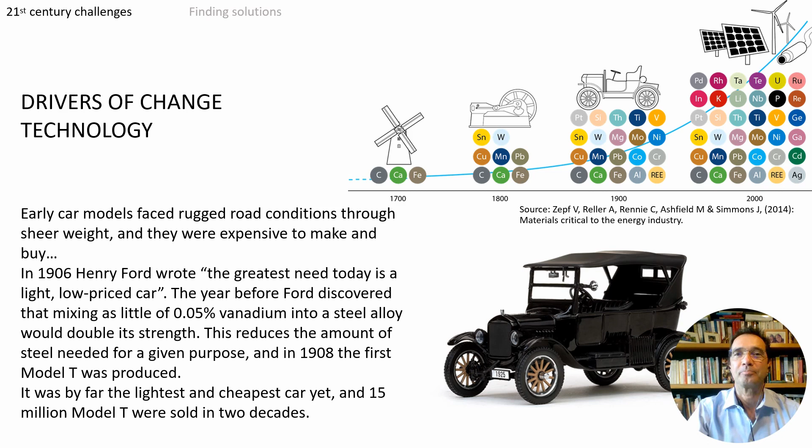Before 1983, most of these G7 countries were also mining countries, meaning that they were extracting the raw materials that their industries were using. Of course, they were facing challenges, not only social challenges. Margaret Thatcher, for instance, was facing opposition from unions. Helmut Kohl in Germany was facing opposition from environmental groups worried about pollution. And these leaders realized that if they facilitated trade, basically enabling the movement of goods and materials all over the world, then they could also give a chance to developing countries.

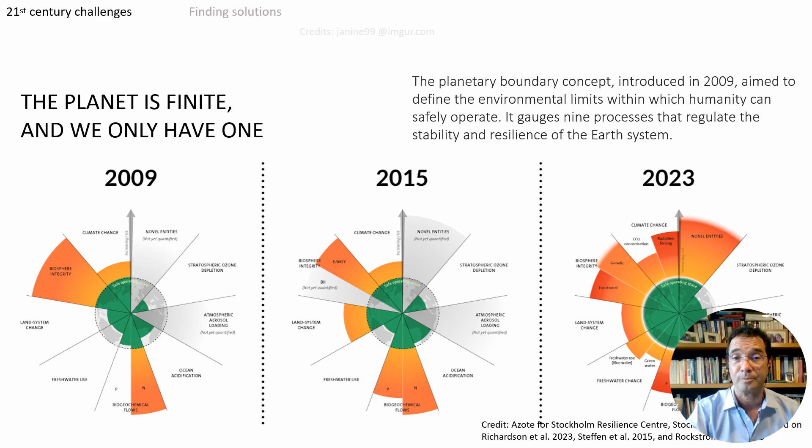And of course, this is already raising alarm, especially for some policymakers, not all. But in Europe, this has been taken very seriously. And looking for solutions, what the European Commission decided already in 2019 was to become climate neutral. So the idea is to make the entire European Union carbon neutral by 2050.

And with this aim, we now have the Green Deal, and we have a new industrial package. The idea is to push forward and accelerate the energy transition, trying to move away from fossil fuels. The problem this brings to Europeans is that renewables are far more materials intensive than fossil energy.

And since 1983, we decided to stop mining, or in a way, we faced a huge decline in mining in Europe because we were relying on trade. What we realize today is that we are 100% reliant on third countries' imports for many, many minerals. And this is a problem. It wouldn't be a problem if we were trading on a level playing field, but this is not the case. So we have basically 2 options.

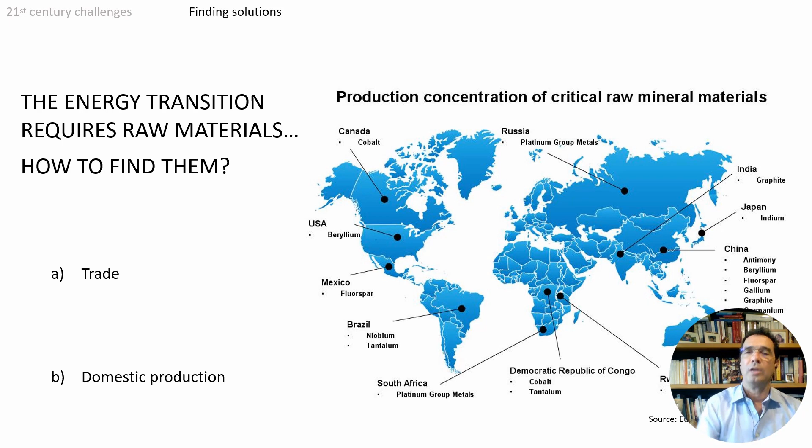Either we look to trade, as we did until now, but we already have concerns because some of these materials that we need to import are crucial to the economy, and they are being extracted in countries where one can have disruptions. That's the reason why we are doing these criticality assessments in Europe every 2 years. So trade is an option. The other option could be domestic production, meaning having domestic mining in Europe again. Looking at trade in more detail, I would say that the big problem is resource nationalism.

We have seen some countries that are saying that if you want to extract the mineral in this country, you also need to increase the value. I mean, the case for lithium, if you want to extract lithium, you need to have the battery factory also established in this country. And sometimes this is not possible because we are talking about deposits that don't have a dimension that is big enough for that. But that's one aspect of resource nationalism.

The other one is political instability. That assessment made in 2022 by Maplecroft, they were saying that out of 120 countries that they assessed, 88 were likely to experience more instability. And probably today, in 2023, one could say that they were fairly conservative, because many countries, look to what's happening now in Africa, that were so far reasonably stable, are now facing turmoil.

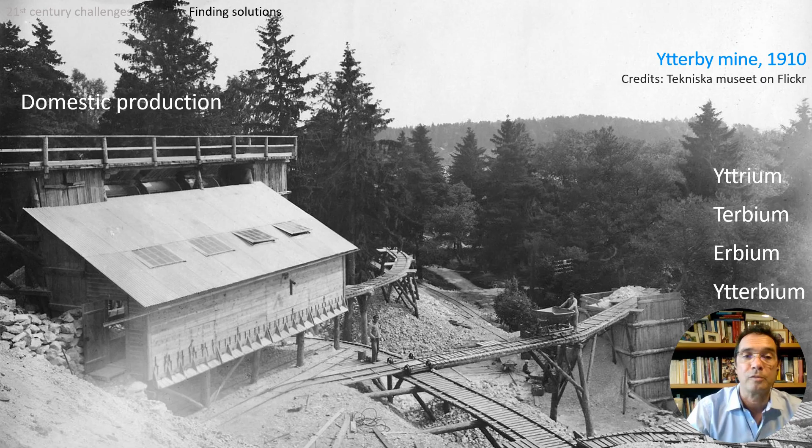That's a rare earths group that were found for the first time in 1910 in Sweden, in a place called Ytterby, located close to Stockholm. So the Ytterby mine in 1910 was producing basically tungsten, but they also found there these rare earth elements. And it was so important that 4 rare earths were named after the Ytterby mine, where they were found for the first time in 1910. So we do have the geological endowment.

But the problem is more complex than most people realize, especially policymakers, because it's not only saying that, okay, we need, for instance, gallium, or we need germanium, so let's mine gallium, or let's mine germanium. This is not the case. Most of these critical raw materials are byproducts of major metals, so major mining operations. This is not the case, if you look to the diagram in the image, for the elements below, like uranium, chromium, lithium, potassium, or tungsten. It's not really the case for rare earths. You can have light or heavy rare earths, but it's the case for most of the other critical raw materials.

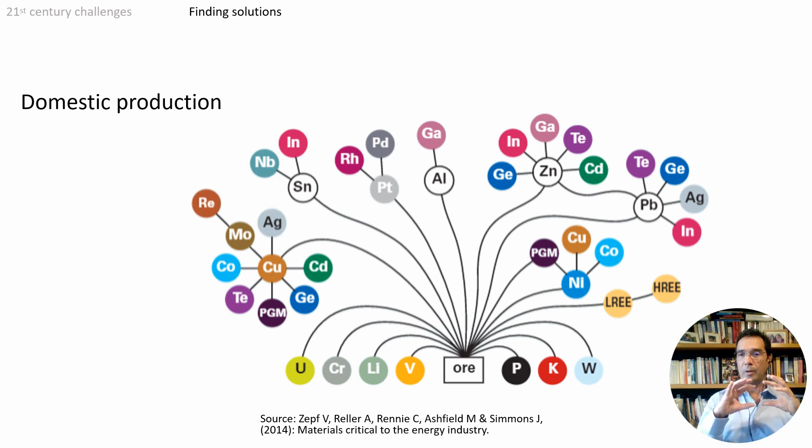So if you want to have gallium, you probably need to extract it from zinc or from aluminium. It's a byproduct of the extraction of these elements. If you want to have indium, again, you'll be looking to zinc mining. And if you want to have rhenium, you'll be looking to copper mining. So the situation is complex, and you cannot say let's have a mine that will be targeting only these critical raw materials, because sometimes you need to have these big mine projects in order to have access to these byproducts.

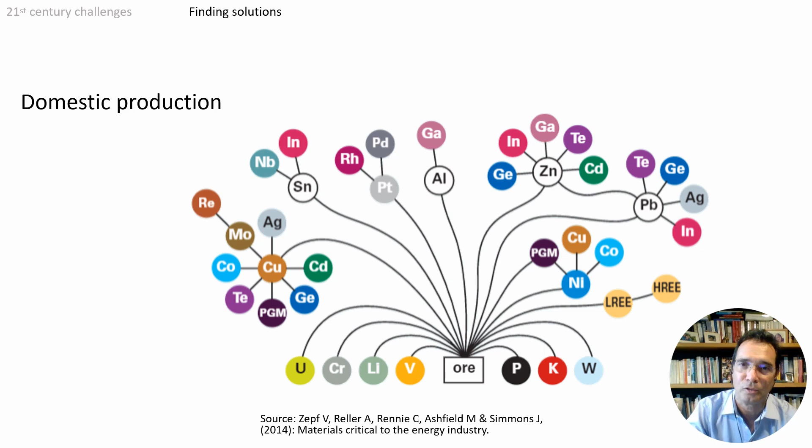So domestic production has this, if you want, this level of complexity, but it has others. And perhaps the most difficult one is the public opposition to mining. One needs to bear in mind that Europe is a populated continent. I mean, we have a huge population. Despite this political will to speed the energy transition, which, by the way, is supported by most citizens, the reality is that if you need to extract the materials that you need for the energy transition in Europe, you'll be facing a strong public opposition.

And these 2 examples are about lithium mining. One is the protests that happened in Lisbon in 2019. People were against lithium mining in Portugal, and we are not talking about lithium mining in some environmentally protected area or in a park.

No, we are talking about lithium mining in the countryside. And the same thing happened in Belgrade, in Serbia, in 2021. So in Serbia, Rio Tinto had a project that was very well developed, an important mineral deposit that could supply lithium for the European needs.

And basically, despite having all the required permits, the environmental impact assessment, everything, once the government announced that they will be giving the mining permit to Rio Tinto, people came to the street, and the protest was so strong they cut off highways, and basically the government was about to collapse. So they backtracked in that decision and they stopped the mining process.

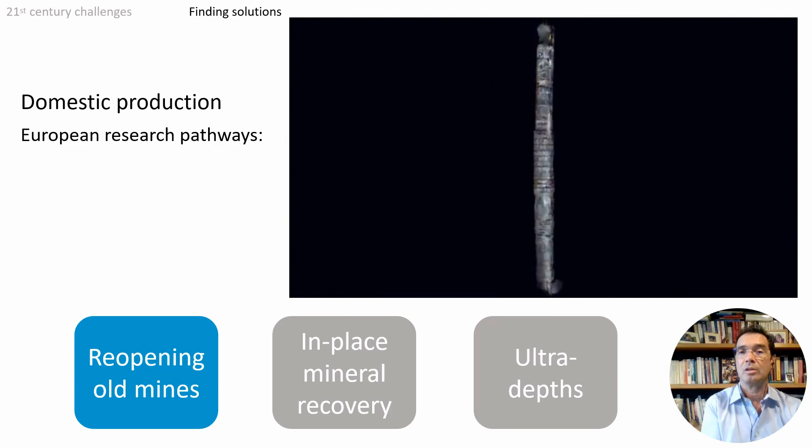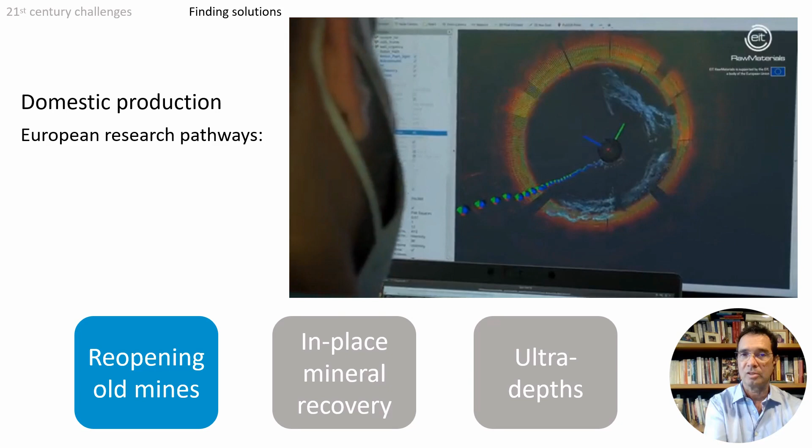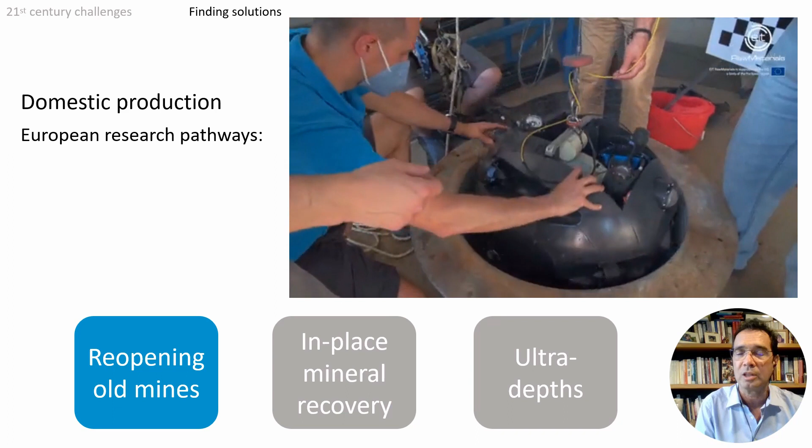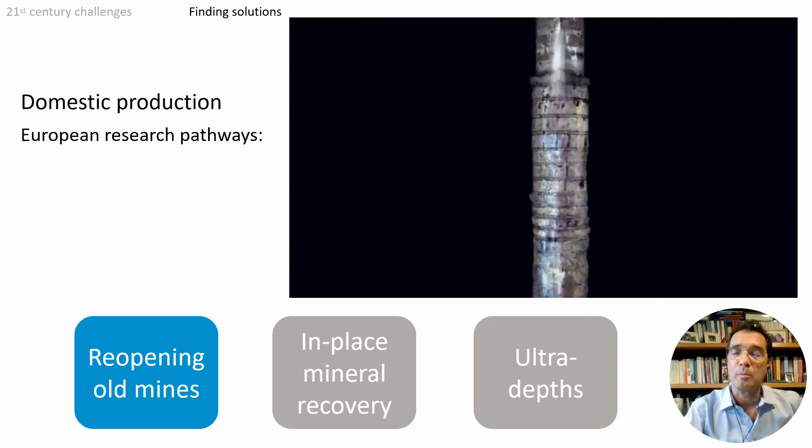The idea is that you have this sphere that you can put down below. The sphere will be capable of navigating under the water and basically mapping and sending to the surface the information on the mineral potential of those areas. This is useful because in Europe we have if not hundreds, perhaps thousands even, of abandoned mines that were closed. Some of them were exploited in Roman times, others in the medieval times, but they are closed for centuries. So having this updated information is very important to assess the importance and the possible reopening of these mines.

That's one solution. Another solution, as I said, is in-place mineral recovery. The most typical example is in situ leaching. But this project that you have in the image, named CRM Geothermal, is looking to a different perspective. So in that case, they are looking to the potential of geothermal deposits to provide also metals and to extract, if you want, at the same time. So having a combined extraction of the heat that is used to produce electric energy and also the metals that exist in the solution.

We know that these metals exist because if you look to the photo above, it's a 20 centimeters pipe that is basically clogged with scales, with calcite or silica scales, and these scales quite often have metals. So they have metals deposits, typically lithium, also strontium, sometimes gold or silver, and of course iron. So the idea is, can we extract the metals from the reservoirs? In that step we could prevent scaling, so enhancing the energy production, and at the same time cover the EU needs for these raw materials.

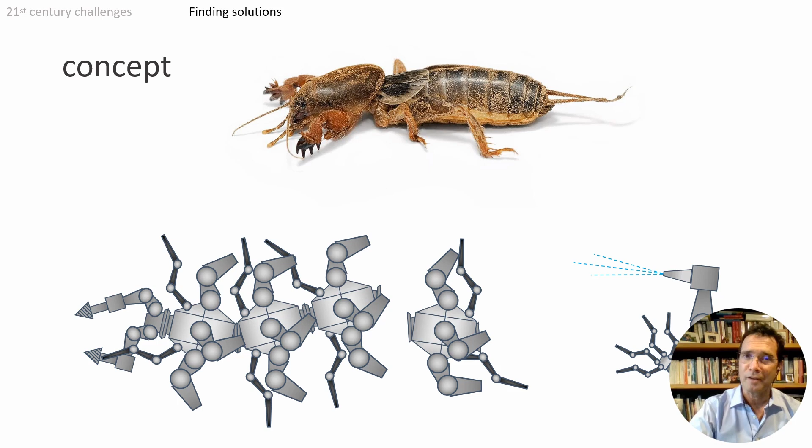And then the robot will be capable of reconfiguring on site, meaning that it will be having a part that will be providing, let's say, the energy. Another part will be having the excavation tools and so on. So the reconfiguration will be enabled depending on the needs that the robot will be having on site underground. So that was the concept. What we have now, it's important to say, it's not exactly like that yet.

So this is the image of the prototype. If you go to the website, you can see the movies. They were doing field trials in Estonia 2 months ago, so quite recently. They will be doing more field trials in Slovenia next month. So all these field trials are basically trying to see how the different parts are assembling and how they are moving. As I said, this is not exactly the final product yet.

It's important to say that this is a vision to 2050, and in the end vision we'll be having something that will be smaller, perhaps the size of a 2 liters Coca-Cola bottle, with these different components that will be self-assembling and having different functions and working underground. So this is what we have now, but what you see is fairly complex.

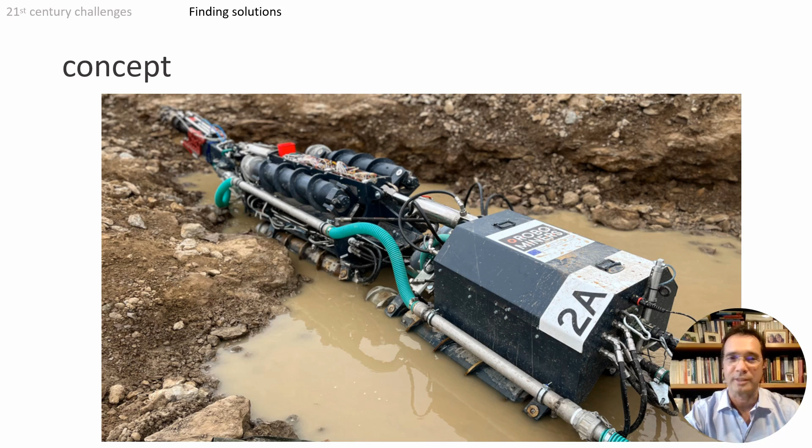And it's fairly complex because this robot has these navigation capabilities and also autonomy enabled already, meaning that once it is down below, it's capable of sensing where it is located. So it is using accelerometers, because we won't be having GPS signals or something like that. The accelerometers are very precise. They will be telling us where the robot is located, because the robot will be following a geological model that will be prepared beforehand. So these navigation capabilities are very important.

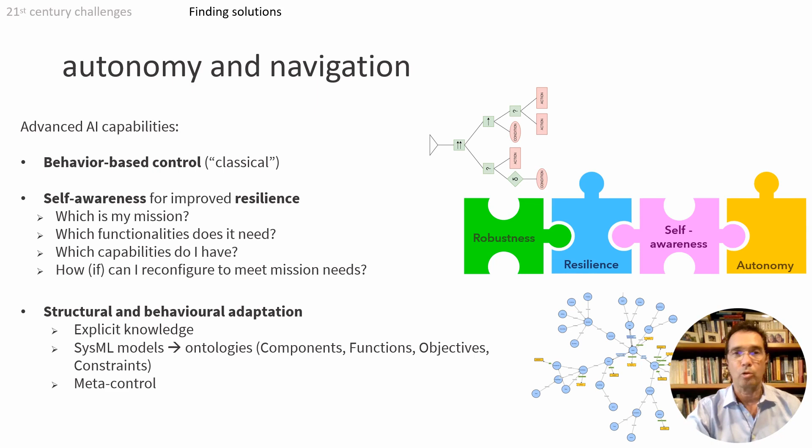It's also important to emphasize the autonomy, meaning that the robot will be capable of even self-repairing, or if you want, self-reconfiguring, using a different module and replacing the modules, and of course using energy, especially going to a docking station or something like that to recharge. So all these features are already enabled in that prototype. They already exist. And the prototype has more.

So for the navigation, I just mentioned the need of using the accelerometers and also to communicate with the surface. You see how the modules in these examples on the left hand side will be coupling to each other. So they will be specialized modules coupling and decoupling according to needs.

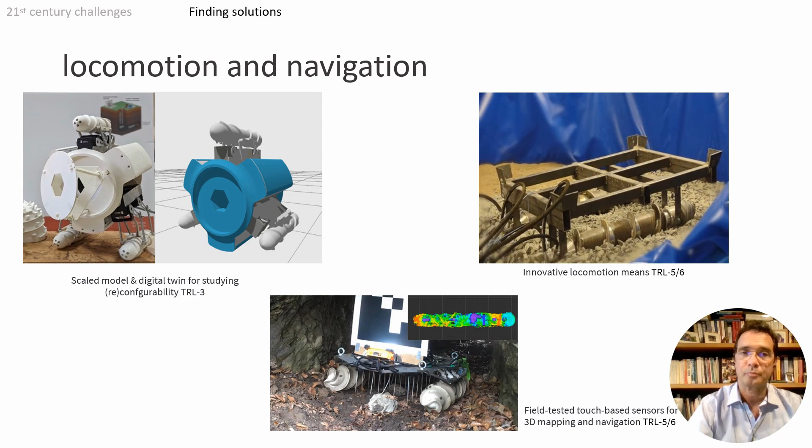And the locomotion uses this Archimedes principle. So basically we are using these rods. The equipment in the prototype has 4 rods, and these can be expanded against the walls of the gallery, in order to hang the robot against the walls to secure it, so we can have the strength to push the arm that will be doing the excavation. So these features are already there.

Also important to underline this sensing capacity, because the robot will be excavating. It will be extracting small rock chips that will be analyzed as they pass inside the robot. So these chips will be analyzed in order to provide the information to the robot if it is really on site, I mean, if it is in a mineralized area.

If not, the robot will need to correct according to the geological model, or in case the geological model is wrong, I mean with an important fault, then this will be communicated to the surface in order to do some sort of reassessment. But this sensing is very important because, as I said, it will be done in real time as the excavation proceeds. So it will be a combination of geophysical sensors and also mineralogical sensors capable of tracking what's being extracted as excavation proceeds.

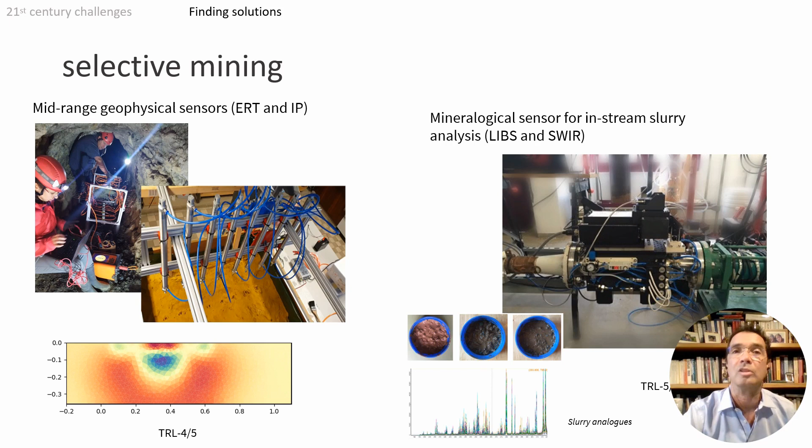For the time being, the prototype will be having this arm using a tricone. The advantage of having the arm is that it can allocate more time to areas where it's more difficult to excavate. It might be also possible to combine hydrodemolition and the tricone drill bit. So this is still under development.

And the production tool is something that is a challenge, because, as you know, in normal diamond drilling, one can replace the drill bit easily. In this case, that will be a challenge because it will be an underground robot designed to work non-stop for several days. So we need to find a solution that is sufficiently stable.

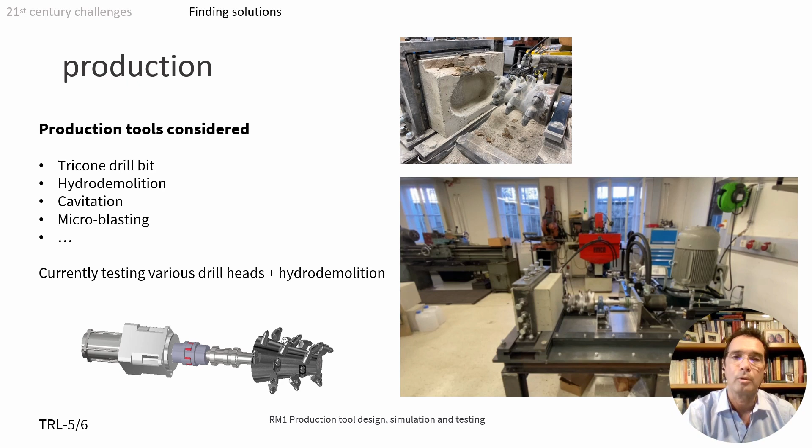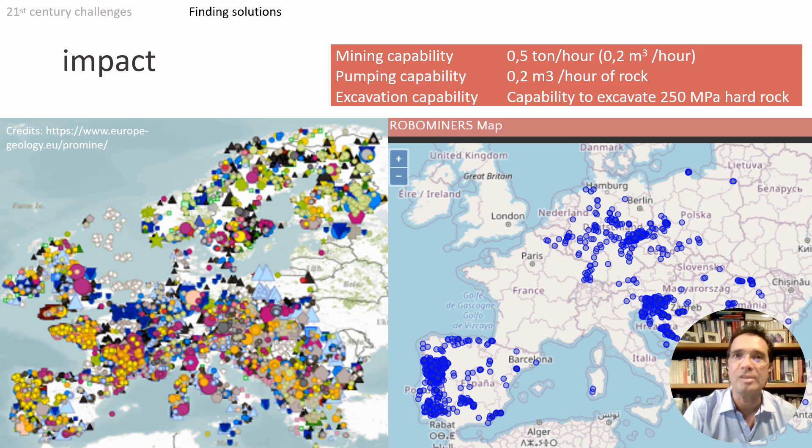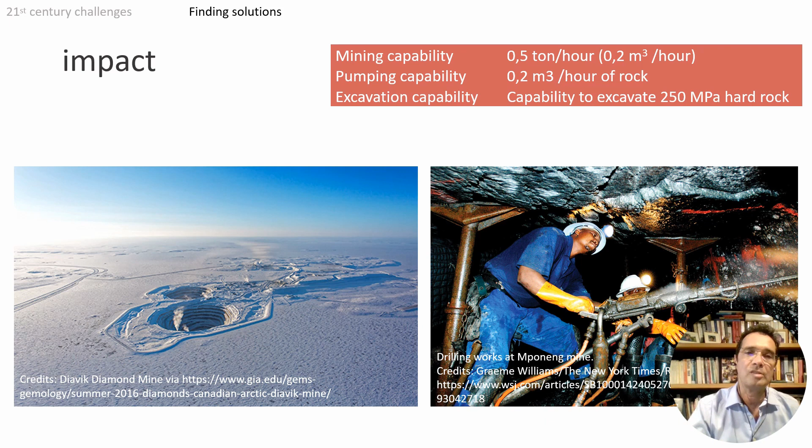You can have not one robot, because as you see, one robot, from the economic perspective and from the amount of materials produced, might not be so relevant, but you can have a swarm of robots. So imagine a swarm of robots mining down below a big city like Paris or Berlin, extracting the minerals there, and this will be a completely invisible mining operation. So these are the sort of futures that this technology might put forward.

Finally, let me emphasize the environmental footprint. If we were together in a room, I probably at this moment would be asking the audience if you have been inside a Roman mine or inside a medieval mine, and asking you to raise your hands. As this is not the case, because this is a remote presentation, just let me emphasize this.

If you visit one of these mines, you will notice that you will probably need to enter crawling, because the access and the galleries are very small. And the reason why is that the Romans were using children. They were using child labor, slaves, children to work underground. This is not something that was done only by the Romans. In coal mining in the UK during the Industrial Revolution, the British were also using children in the coal mines, and the reason was basically to minimize the amount of waste rock to extract. By extracting less rock, it minimized the amount of effort to be made.

I would say that with this technology, by using a system that goes only to the mineralized areas and avoids the extraction of waste rock, the environmental footprint will be much smaller, because we won't have this huge amount of waste rock on the surface. So that's a very important issue to underline.

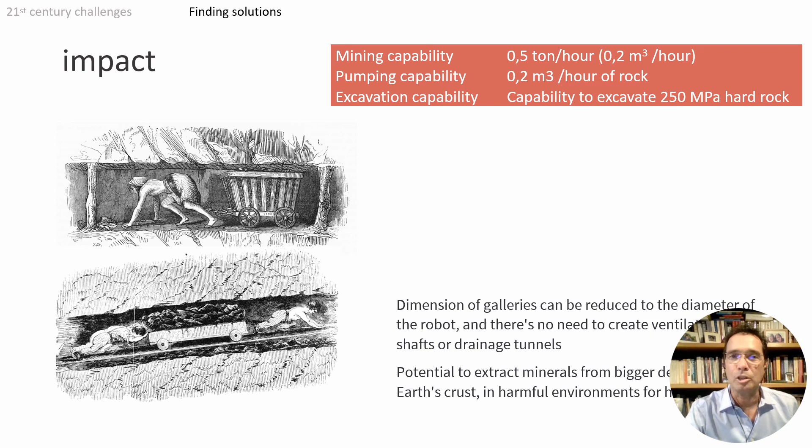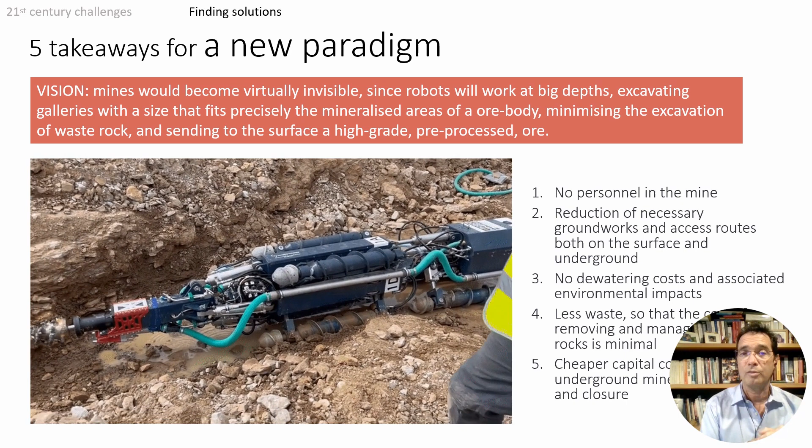And if I may, to close, I'd like to give you these 5 takeaways for a new paradigm. Remember, I'm not talking about 2025, I'm talking about 2050, so a roughly 25 year horizon. What we expect to have in this time frame is something that, using robotic technology, will be virtually making mines invisible. And I believe this is probably the most important outcome of this paradigm.

What you have on the right side: no personnel in the mine, minimizing the groundworks, and of course that also minimizes the capital costs for the initial investment. No dewatering, so you don't need to pump out huge amounts of water from the mine, with all the environmental impacts and costs that this has, and of course less waste.

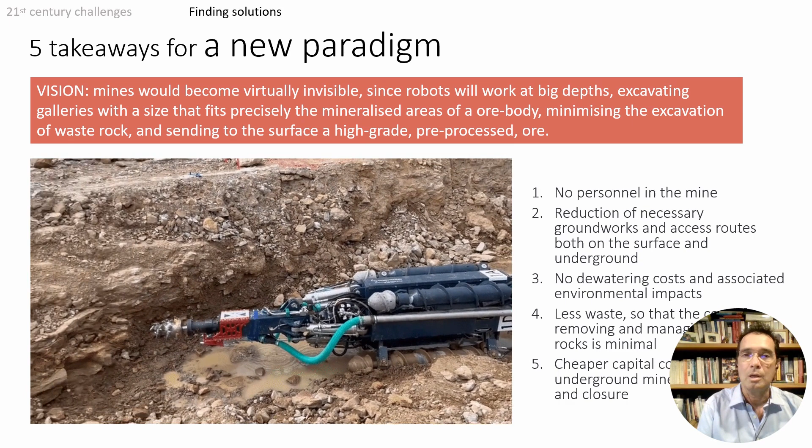So this new paradigm, we do believe that it might be enabled in a few years, thanks to these European Union research and innovation funds. So to close,